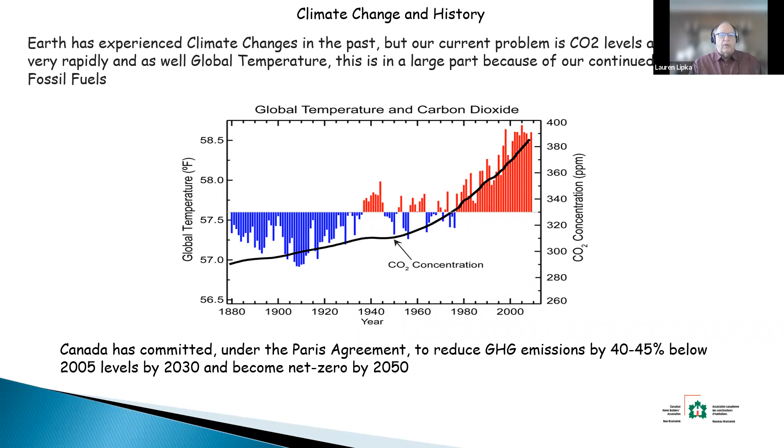So what is promoting energy efficiency in buildings right now? The law. Around the 2015 and the 2020 National Building Code dictates minimum levels of energy efficiency when constructing new or renovating existing buildings. This is what the codes look like.

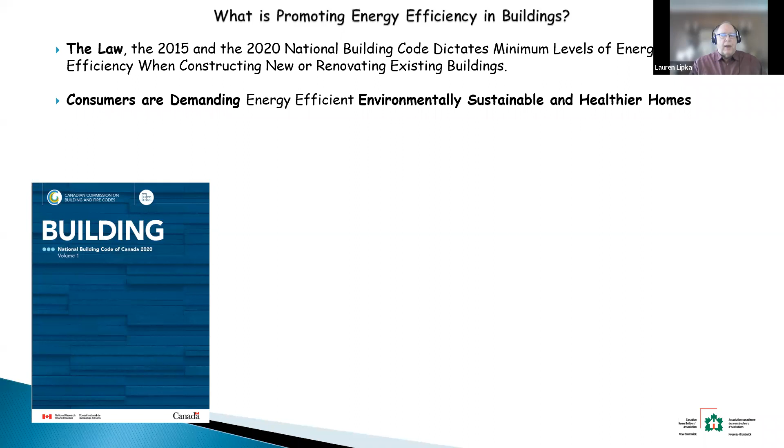Consumers, like yourselves, are demanding energy efficient, environmentally sustainable, and healthier homes. Energy upgrading saves homeowners money, typically will pay for themselves, improve durability and comfort, plus lower greenhouse gas emissions.

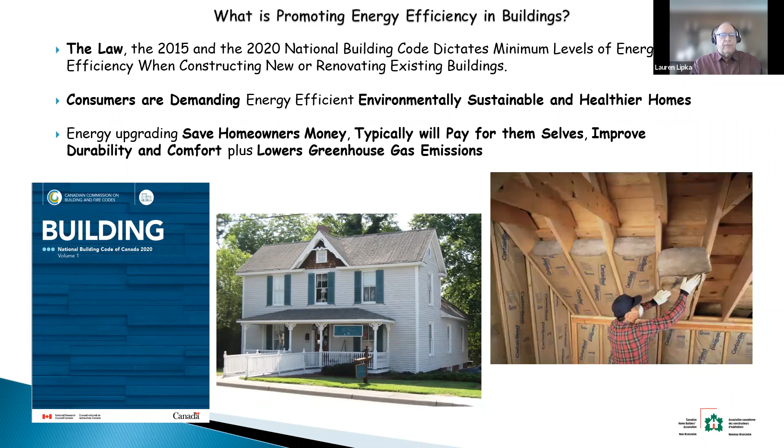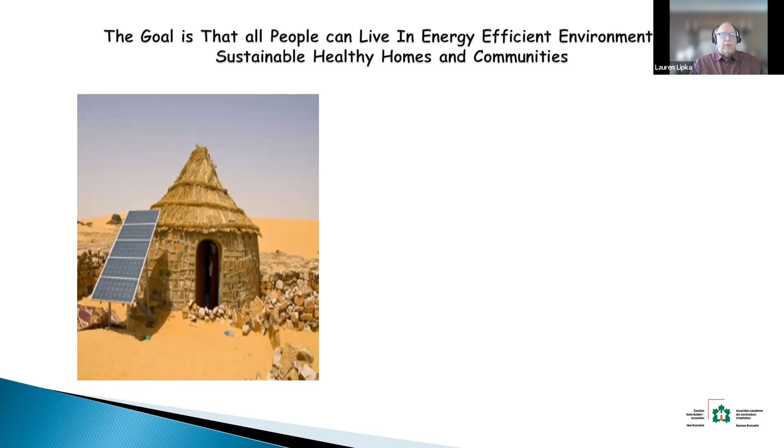The goal is that all people can live in energy efficient, environmentally sustainable, healthy homes and communities. Let's look at some characteristics of what an energy efficient, environmentally sustainable, healthy home might look like.

Homes that have reduced volatile organic compounds, VOCs, by using painting and cleaning products having low VOC content, as determined through Green Seal, EcoLogo, or GREENGUARD certification programs, for any products that are considered green and are made from products that are natural and not chemically based.

Use of energy efficient, Energy Star qualified appliances and lighting like LED. And the implementing use of home energy displays, providing real-time actual energy consumption or energy saving automation systems.

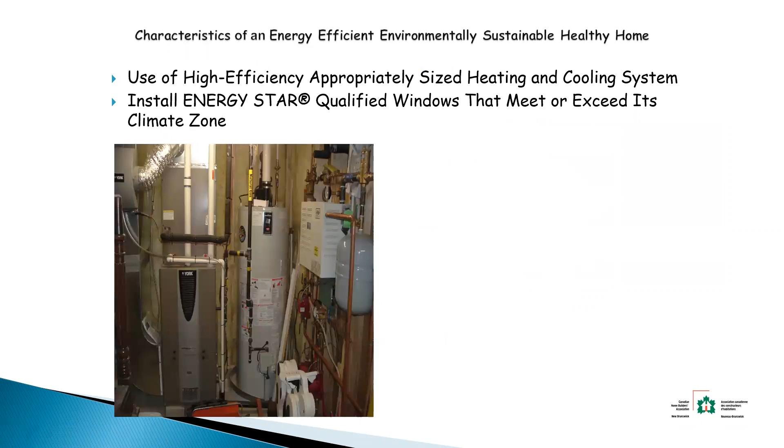Excuse me, Lauren. Yes, go ahead. This is Sheila Scott, one of the teachers here. I know a lot of this is probably quite complicated because these are English second language students. Could you just go back a few slides and show the pictures of the things that students or anyone can be buying that would save money? So yeah, right about there, right about there.

Just explain that a little bit more and repeat it a bit more slowly. I'm wondering, are the interpreters able to interpret? I'm not sure they're having enough time. Yeah, I was going to ask that. I was wondering if maybe I was going too fast, but at the same time I didn't want to go too slow either.

Well, just like you need to take a pause so they have time to interpret after each little piece of information. That beginning stuff was quite difficult to understand if English isn't your first language. But I think we need to focus on the things that can be of benefit to them, to save money, so if you can go a little more slowly and focus on the key points, and give time for the interpreters to interpret, that would be great. Thanks so much. Oh, no problem whatsoever.

For this first slide, what we're looking at is that if you have products like this in your home, it's maybe a good idea to remove them. We have redemption centers in this province where all these different chemical products can be disposed of safely. We don't want to be breathing these types of chemicals, they're harmful to our bodies.

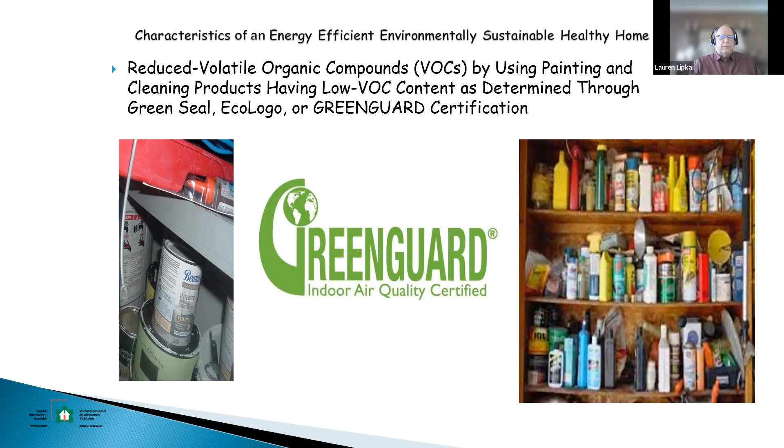When it comes to buying appliances, there are many appliances designed to be energy efficient. Appliances that show this label, the Energy Star label, or the EnerGuide label, should explain to you how much energy this appliance would use.

So things like refrigerators, dryers, washing machines, dishwashers, microwaves, and ovens. Changing out your existing older style light bulbs for energy efficient LED light bulbs. And of course, always look for this Energy Star label on appliances and lighting.

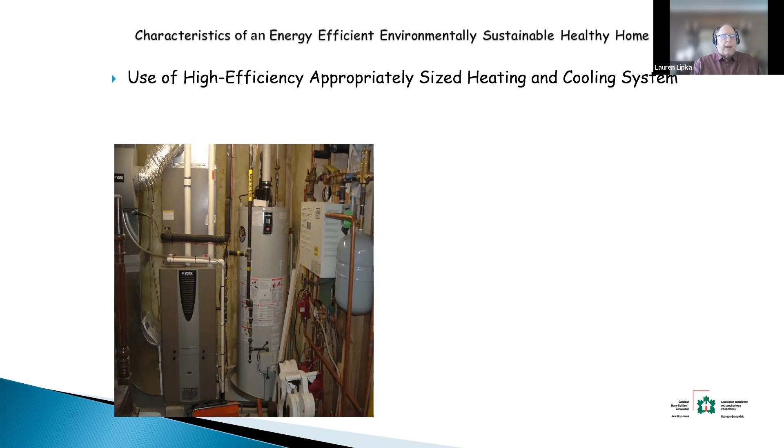Heating systems, of course, you want to find the most energy efficient, and look for the Energy Star logo on any type of heating system as well. Energy Star appliances, Energy Star heating systems, and the most energy efficient systems you can find. Working with companies from local hardware stores can help you find the most energy efficient makes and models that may be out there.

If you are replacing windows or doors, try to find Energy Star qualified windows that meet or exceed our climate zone. When I say climate zone, I mean a window designed for very, very cold regions or areas is the type of windows we should be looking for.

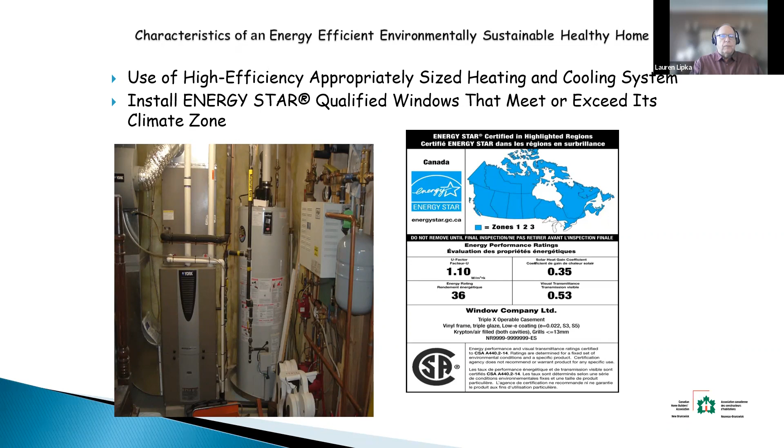When it comes to things like washing machines, sinks, showers, maybe spare bathrooms, if possible, have your hot water tank more in the center so it doesn't take so long for hot water to get all the way to the furthest part of your home. Another thing: if you wash your hands, try to use cold water rather than hot. Because if you turn on the tap, hot water has to run all the way to the furthest spot, and once you turn off the tap, that water just sits in the line and is wasted energy.

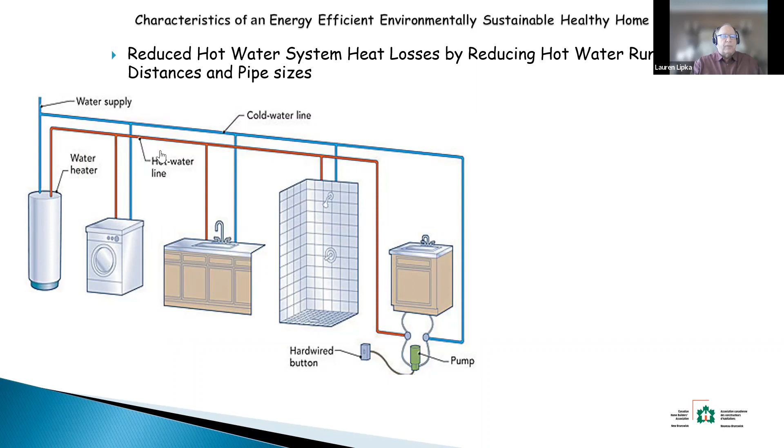You can also insulate the lines as best you can, which helps reduce some heat loss. In winter this isn't too bad, since some of the heat energy helps heat the home. But in summer it can cause condensation or water to drip off the pipes, causing damage, and the heat from these pipes can cause unwanted heating in our home.

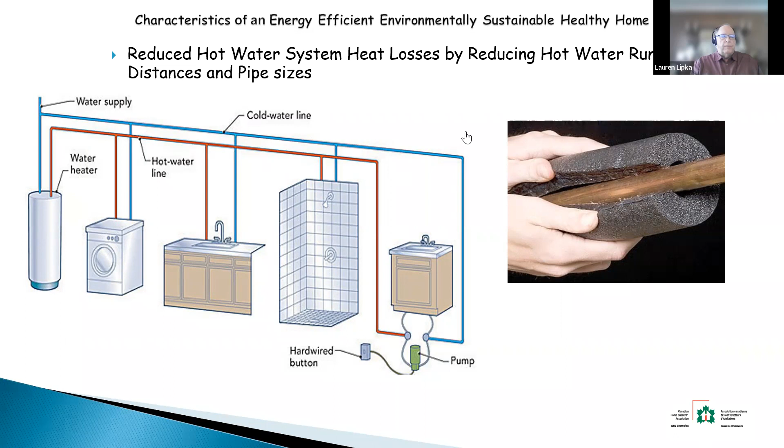Using water conserving plumbing fixtures like low flow shower heads and faucets.

As you can see, if we were looking at a normal shower head, the flow is around 9.5 liters per minute. With a low flow shower head, it's 7.6, and bathroom faucets can be as low as 5.7. What this means is that we're conserving the use of water, helping to protect our environment by using less water.

And by using less water, we also will not have to pay as much for heating it as well as for using it. It will save us money.

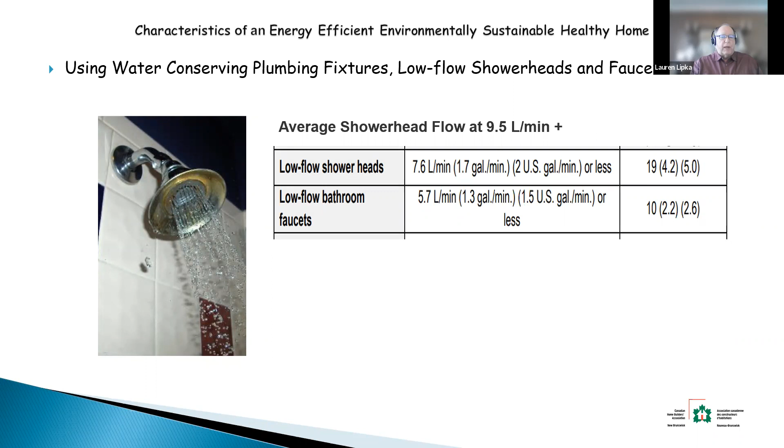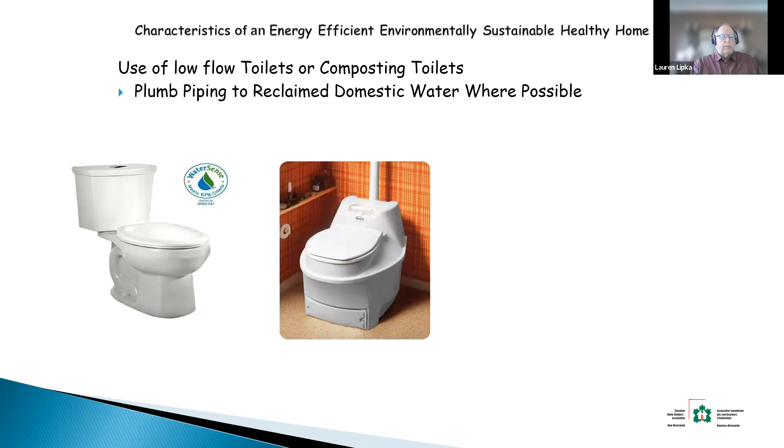Use of low flow toilets or composting toilets. Also, looking at alternative designs where you could wash your hands and this water would then go inside the tank, then could be used for flushing.

So we all agree that upgrading existing homes or designing new homes to be more energy efficient, environmentally sustainable, and healthy is a worthwhile goal.

What else can we do to reduce our personal energy usage and our carbon footprint?

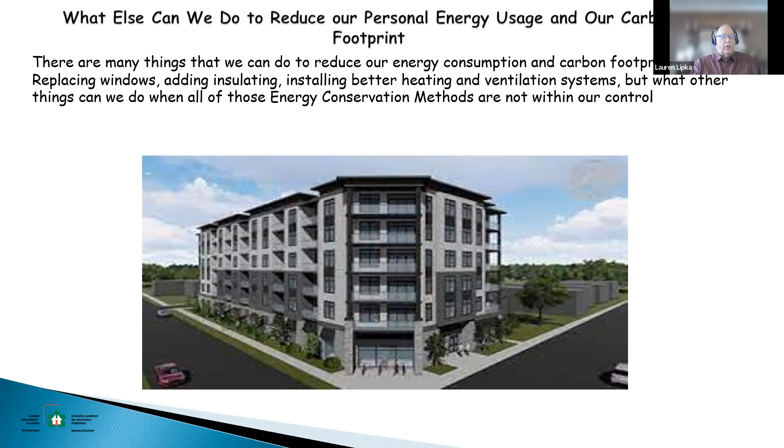We can look at the energy pyramid and do things like turn off lights and electronics when we're not using them. Unplug appliances or use power bars to be able to shut them down when we're not using them. Have shorter showers and try to conserve water usage as best we can.

Then, as we move up onto the pyramid, we can do things like LED lighting. LED lights use less energy than normal light bulbs. Smart grid infrastructure, so learning about how our grid works. Energy efficient, smart appliances. Programmable thermostats, which is how we can control the heat in our homes.

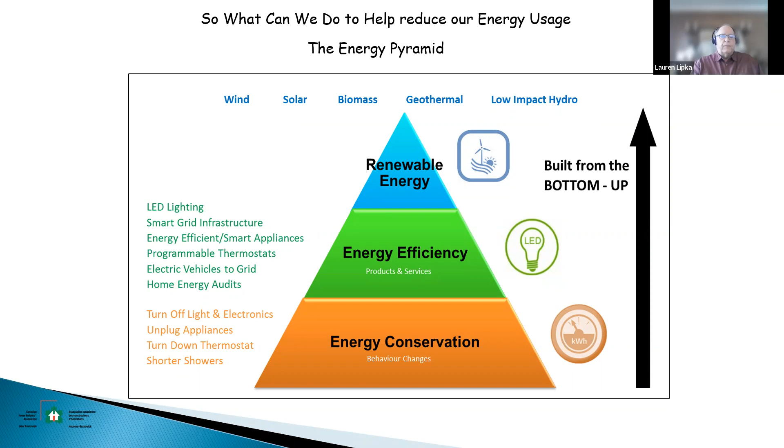So what are some other things that we can do? Participate in education programs promoting energy conservation. Participate in energy efficiency programs to use less energy and reduce greenhouse gas emissions.

Shift when we use energy to reduce peak demand in mornings and evenings. Changing our daily behavior can collectively help to smooth out the peaks. I will explain how this works.

In the morning, we all get up. We may turn on our coffee pots, we may have showers, we'll cook breakfast. And if everybody in the province does this early in the mornings,

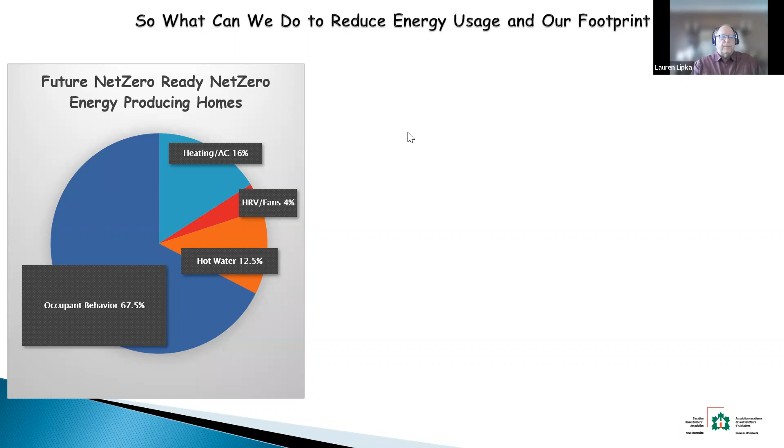So I have a few more things we can look at that can help us save energy and reduce our carbon footprint as well: air sealing of our homes - this is where air comes in around windows and doors; using more natural light; what artificial lighting is energy efficient and healthy; home electronics and phantom power use; and energy efficient appliances. We're going to look at some of these things in this workshop today.

What else, when we're leaving the home, what could I do to also help conserve energy while I'm away? And when is it time to recycle or donate some of my older products?

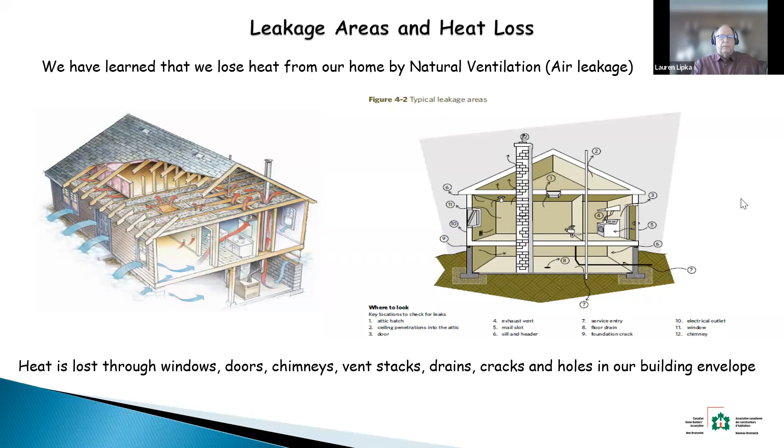Typically, about 25 to 35%, or even higher, of heat loss can be due to excess air infiltration and exfiltration, or leakage out of our homes.

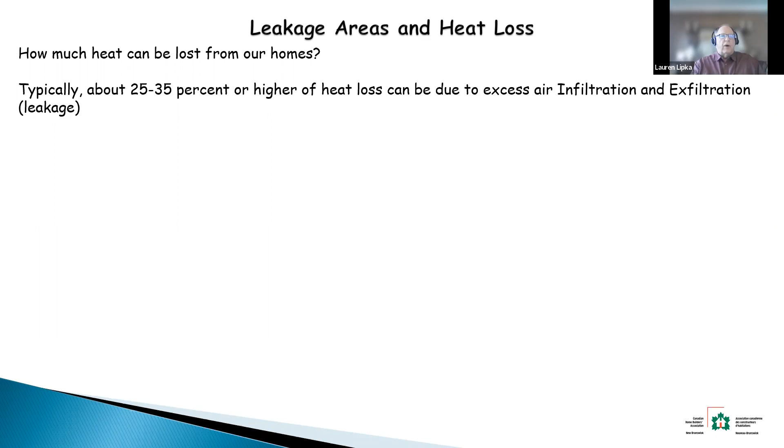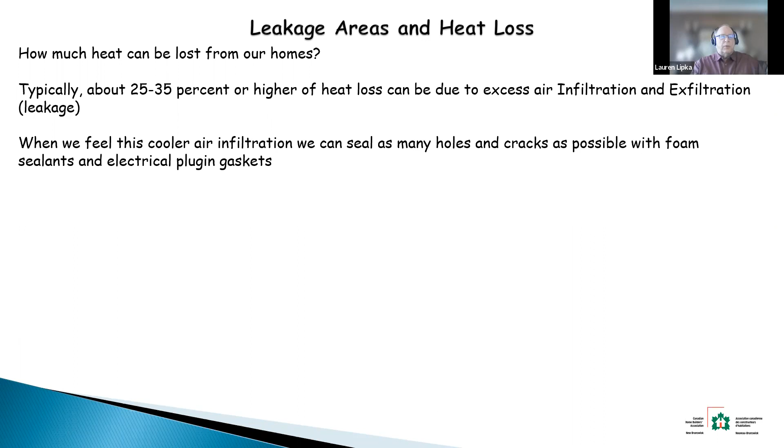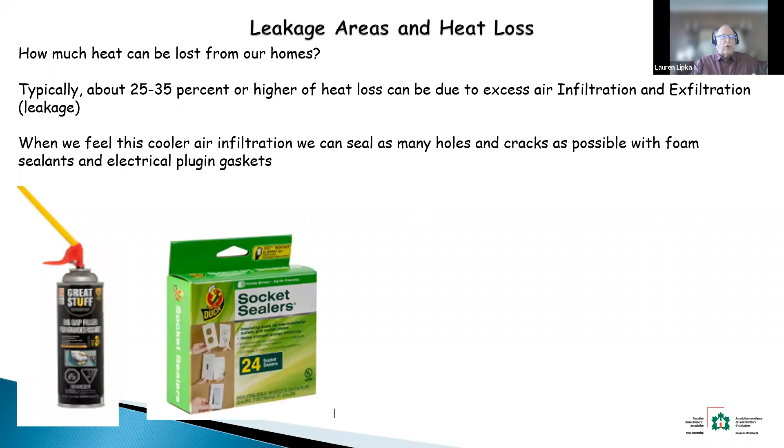When we feel this cooler air infiltrating into our home, we can seal as many holes and cracks as possible with foam sealants and electrical plug-in gaskets. We can also use these products to seal different places in our homes, and childproof plugins into any electrical sockets that are not being used at the present time.

Many of these products can be purchased from any local hardware store, and they can assist you in how they can be used or installed in your home. Many should also have directions and be able to help you or assist you to implement these different products.

Spray foam works well for filling holes or cracks that are fairly large. Gaskets work well for around plug-in covers if you can feel air coming in these areas. Same after that, using the child-proof plug will help to seal off any plugins that are not currently being used.

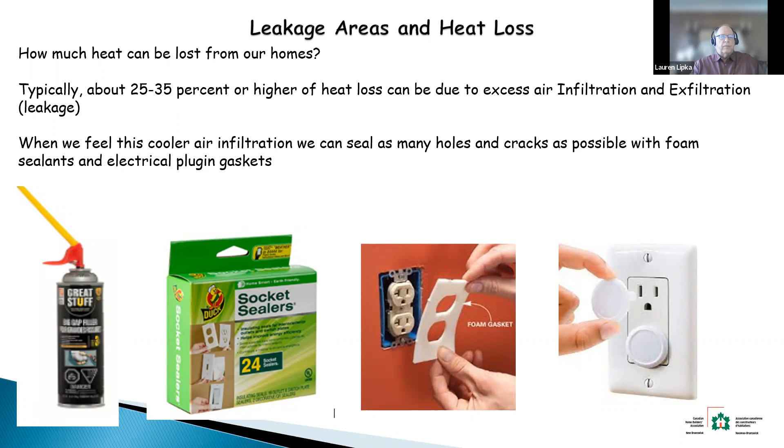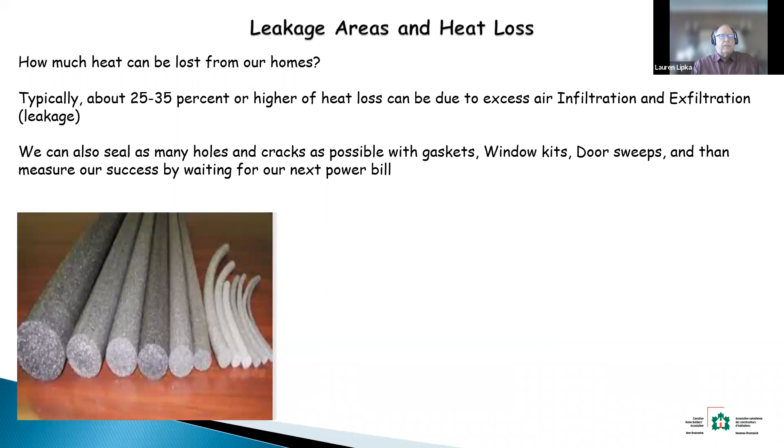We can also seal as many holes and cracks as possible with gaskets, window insulator kits, door sweeps, and things like that. These are like swimming pool noodles and come in all different sizes and shapes. Or if you have an older window, these can be used to cover over your window to help slow down some drafts that may be coming through them.

Door sweeps can be purchased from your local hardware store - all of these products can be. And this will help to reduce drafts coming in from underneath your doors.

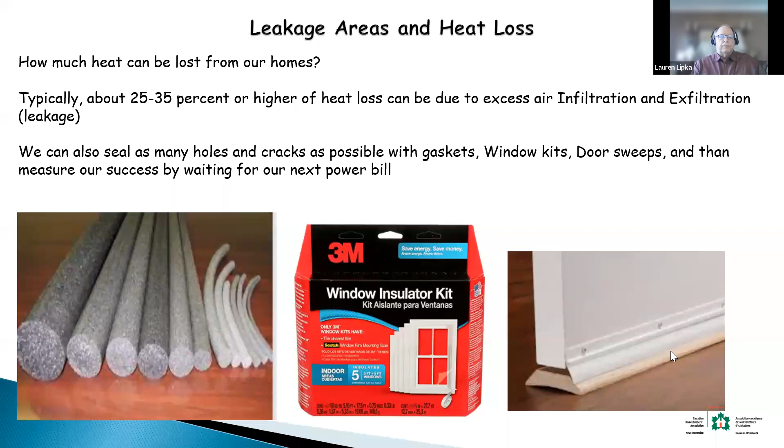However, as we seal our homes, there is less natural air exchange. And at a point, our home may require what we call mechanical ventilation. We should look to install what is called a heat or energy recovery ventilator - HRV for heat recovery, or ERV for energy recovery ventilator.

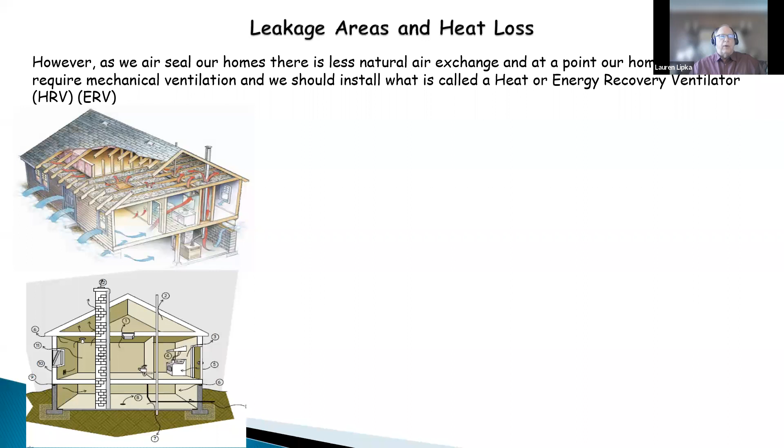You'll be able to tell that once you start to tighten up all of your homes or seal all the holes or drafts, air infiltrating into our homes and heat energy exfiltrating out will change. Once we start to tighten up all the different leaks, we will need more ventilation or air for us to breathe in order to have clean air that we can breathe.

Otherwise, if we start seeing things like condensation on our windows and on our walls, this is an indication that we may need more mechanical ventilation. What if we start to see things like mold or mildew? These are also signs that we don't have enough mechanical ventilation in our homes.

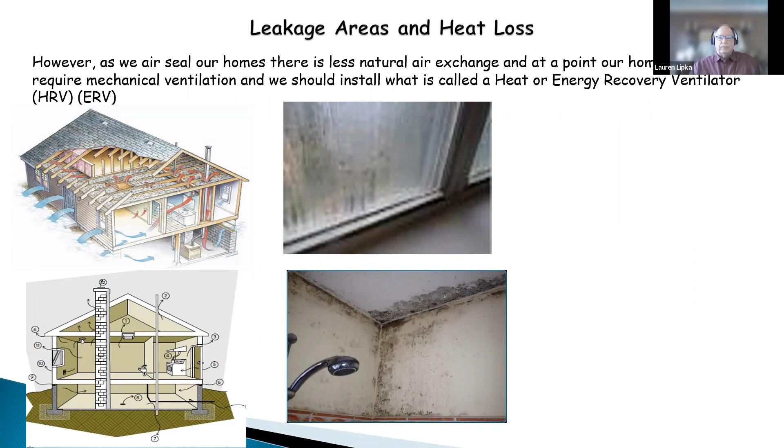This is called sensible recovery efficiency. The more efficient the HRV or ERV is, the more energy it will recycle back into our home, saving us money and providing fresh, clean air for us to breathe, and also helping to reduce condensation or excess moisture that has been building up in our homes.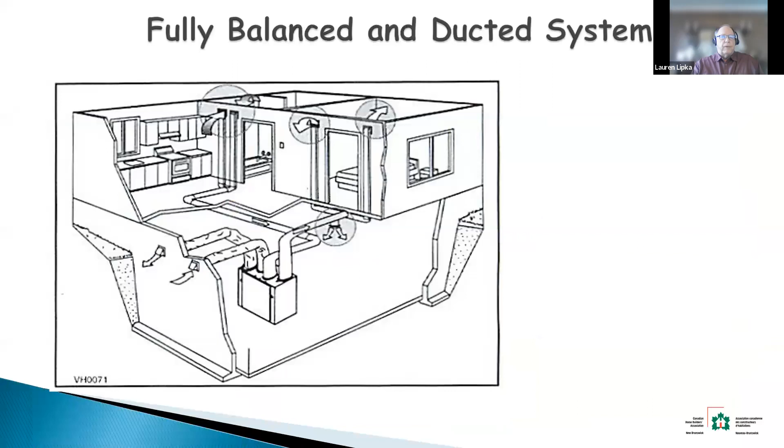So when I talk about humidity in the homes, this is what I talk about. We don't want our home too dry, and we don't want our homes too wet. At this time of year, because the air is very dry, if you're experiencing static electricity when you touch things and get a spark or shock, or if your furniture may be cracking or your floors are separating, or you're having respiratory irritations or nosebleeds, these could be indications that the air may be too dry in your home.

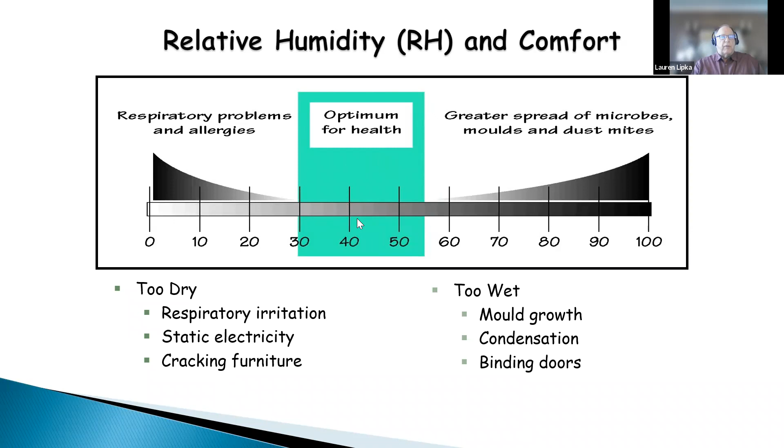On the other end, if you have lots of moisture on your windows, or if you can see mold or mildew growing, these could be signs that your home has too much moisture. You can start to see mold, condensation, binding doors. When I talk about binding doors, that's where doors and cabinets may not want to open, because they're filling with moisture and expanding. You can also have more chances of microbes, dust mites, things like that. So controlling the moisture levels in our homes is very important.

How much humidity do we need in the wintertime? In the wintertime, we're looking at around 35 to 45%. It's called relative humidity. If you're experiencing things when it's really dry, you may have to add some moisture to your home, things like showering, washing clothes, cooking food on the stove. These all create moisture in our home, and we don't want too much. On the other end, we also don't want it too dry, because that can also cause problems for us as well.

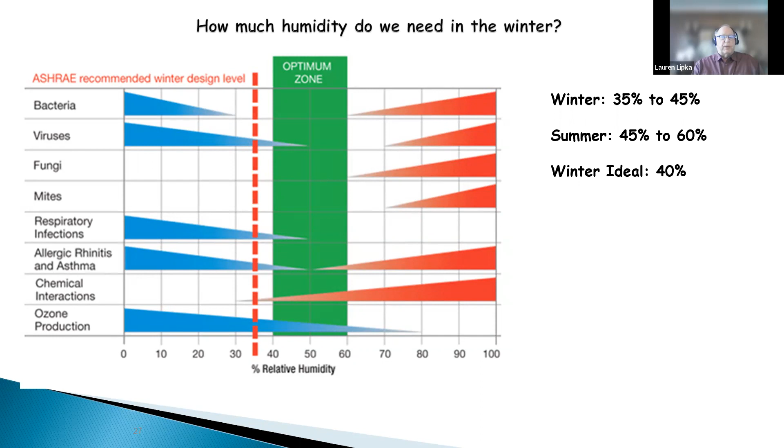In the summertime, anywhere from maybe 45 to 60%. In the wintertime, it'd be ideal to have around 40%. Otherwise, if it becomes too high, you'll start to see lots of moisture forming on your windows. This moisture inside your home can cause damage and issues, and will start to cause window frames or anything that's a wood product to start to rot.

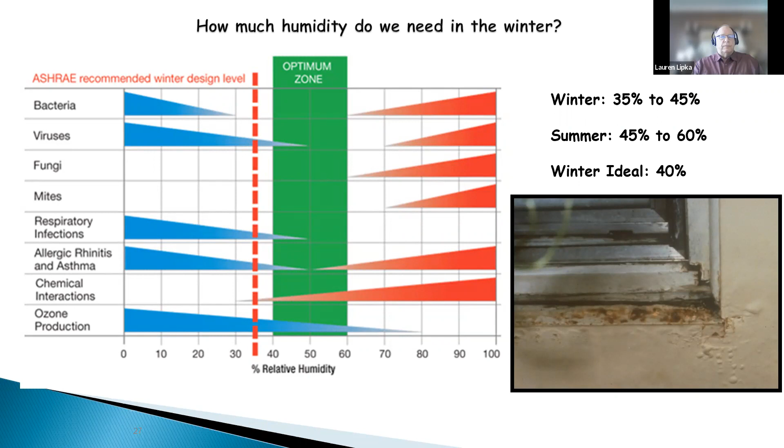Natural lighting: humans prefer to work and live in spaces with natural light rather than artificial light, as natural light helps to create a more comfortable and pleasing home. However, our preference for natural light lies deeper and is intimately connected to our brain functions and natural body rhythms, or circadian rhythm, which is our body's 24-hour sleep-awake cycle.

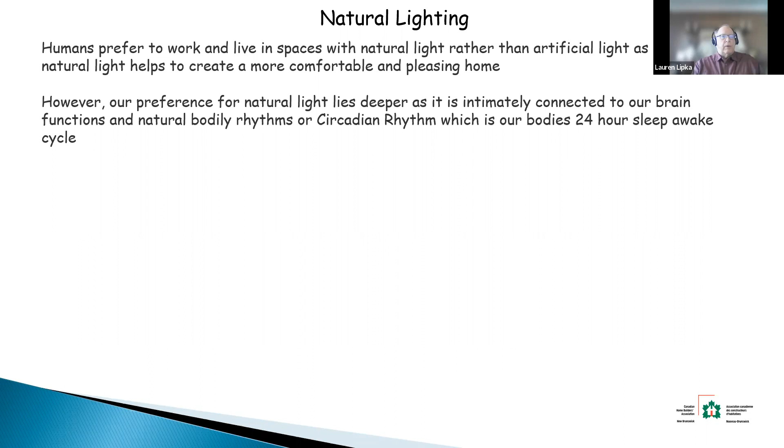Countless studies have proven the benefits of daylighting, such as increased productivity in the home and workplace, enhanced educational performance in elementary schools, and improved patient recovery times in hospitals.

Studies have shown that being exposed to daylight or only artificial light over the course of several days, people living and working under natural light were significantly more alert, while exposed to artificial lights, participants feel more tired due to lower cortisol levels, leaving them more stressed and with reduced energy levels later in the day. Cortisol is a stress hormone which controls sugars or glucose in the bloodstream, enhances brain functions, repairs tissues, and controls potential fight or flight situations.

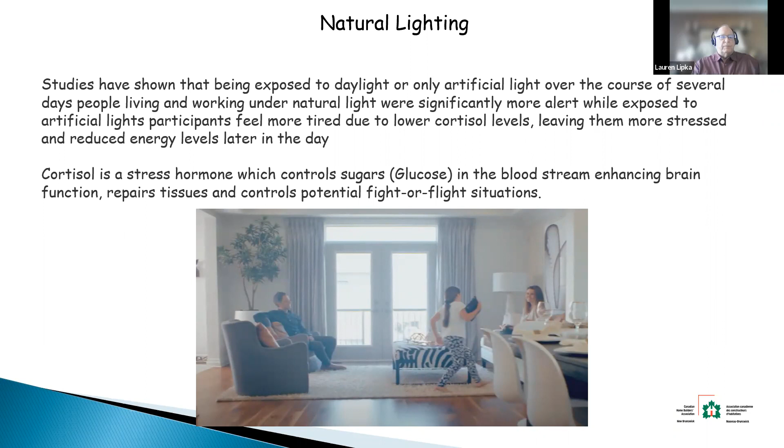Things we can do to bring more light into our home: install larger energy efficient Energy Star windows and doors, letting in more natural light as much as possible. Add mirrors and shiny objects. Choose brighter interior colors. Try glass blocks for wall dividers to let more light travel within the home. Clean windows and paint trims white. Use lighter window treatments. And if possible, add skylights and things to our homes.

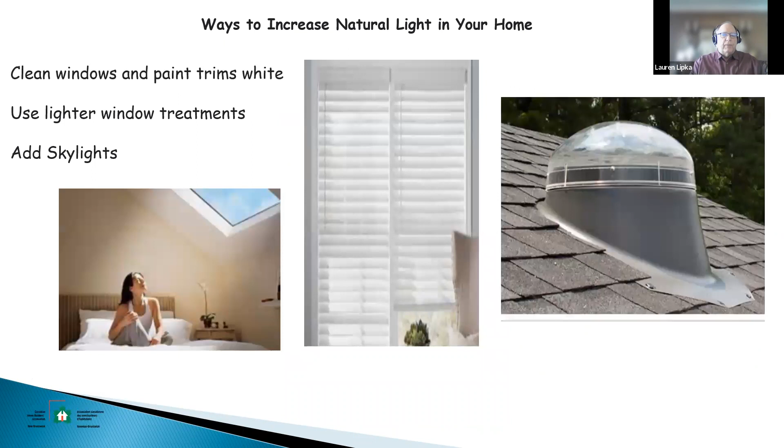But I'm just going to ignore that for a second here. I'm going to go through and pull up a website for you that some of your participants may be able to go to and get some assistance with the items you're talking about. It was for the next presentation, but I'll just go forward really quickly here and bring it up. Or, I got a better idea, what I'll do is just this for a second. Just bear with me. If you were to go to your website and type in save energy NB, right?

They have what's called the NB Power Energy Programs. So if you were to click on that, and then go to the section that says 'For Homes,' there's a section, it's kind of tricky to get to with your mouse. There's one called the Renter Energy Saving Kit Program. If you open this up, there is some information for renters, they can ask questions, things like that. And they can also order this kit for free. So you can order this kit, and when it comes, there are some different things included. Each kit will contain the following easy to install products.

LED light bulbs, an LED night light, and an electric power bar, and faucet aerators to help reduce some of your water usage.

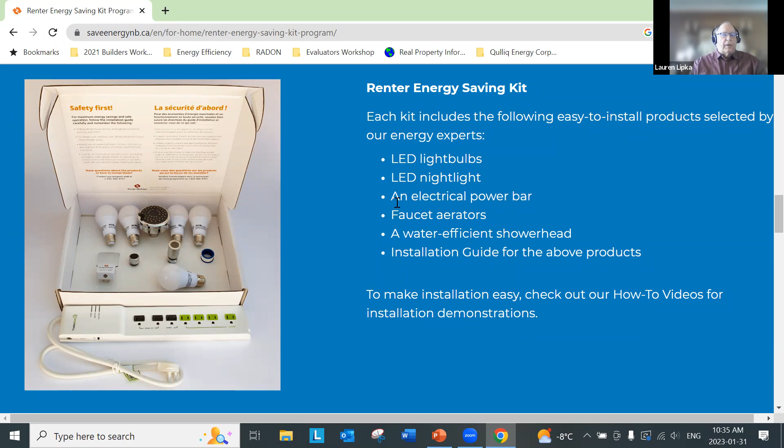A water efficient or low flow shower head. Okay, and then installation guides for all of these products and things like that are all there. There's also some do-it-yourself installation videos that they can watch on how to install these products in the home.

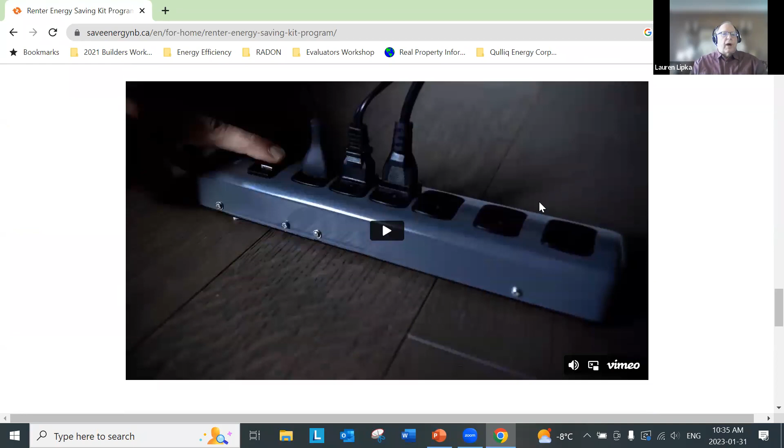Some things on how it talks about phantom loads and power bars, and how to install the faucet aerators. Things like that. All right, that's good to know.

I will also come back to this again when we do our second workshop. But I just want to show you that if you wanted to, inside here there are places where you can ask questions, learn more things. You might also have some of your participants maybe looking to eventually buy their own home. Hopefully that would be the plan for everyone eventually, to have their own homes. And these are all things that can help you to be able to get some incentive money for appliances, things like that.

Thank you. And that's at, you just type in Save Energy NB, it's right there. Save Energy NB, and this information will all come up. So there's also education and tips. Sometimes it's a little bit tricky to use, but saving energy checklists, energy efficiency how-to videos, energy efficiency articles, many of the things that I would be talking about, educational tips on air sealing, articles, things like that.

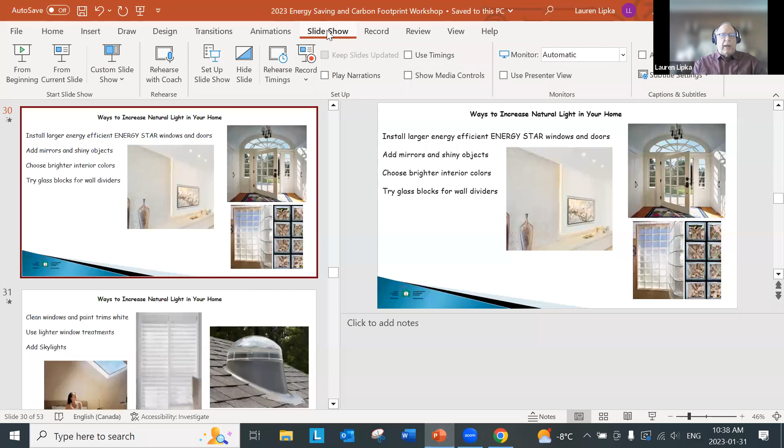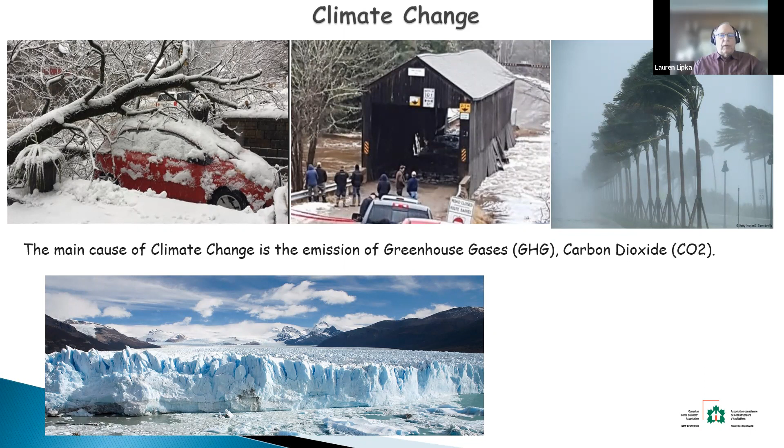Thank you, no problem. Any other questions that anybody may have from the workshop? Because I can go back over anything that anybody would like more information on or to discuss in more detail. I am totally at your... Hello, Lauren, I have one question.

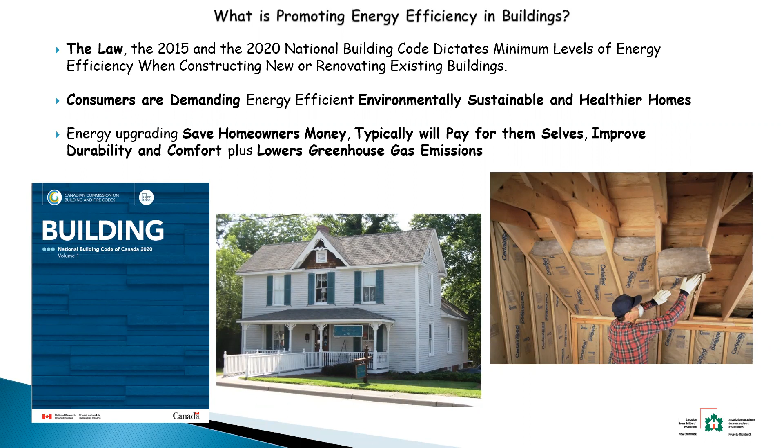Are there some incentives for shifting energy use to evening or morning? For example, does energy get cheaper in the morning than another time? Right, that is a great question.

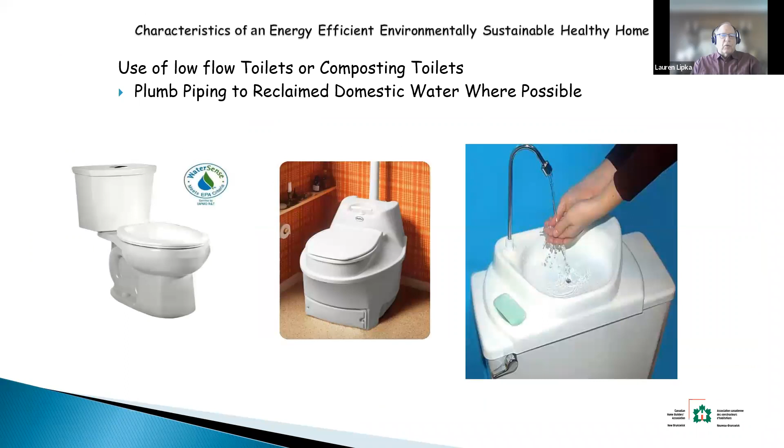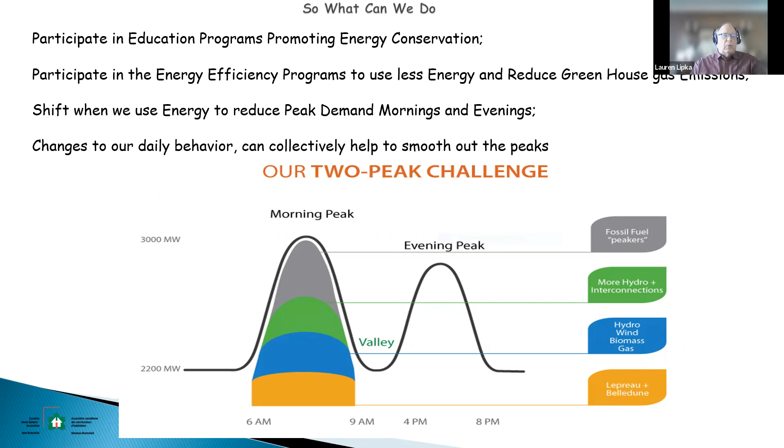Unfortunately, in the province of New Brunswick, we still don't have what they call time of use yet, but I think that maybe in the future we may see this. For the other participants, what this gentleman is talking about is that in other provinces, in some areas, if you use electricity off these peak times, there's sometimes a reduction in the cost. Or if you do your laundry at night, cooking at night, or charging up your car or batteries at nighttime, sometimes they have a reduced rate, but unfortunately New Brunswick does not have a time of use reduction yet.

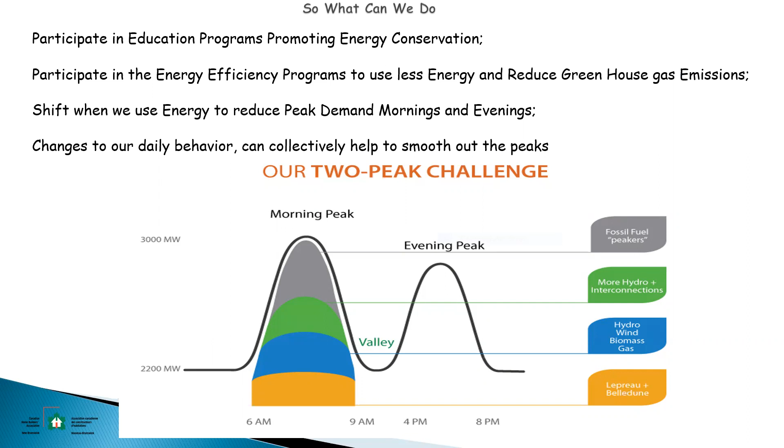Thank you, I have another question. It's about the energy monitor. Okay, who can install this? Can I install this in my home?

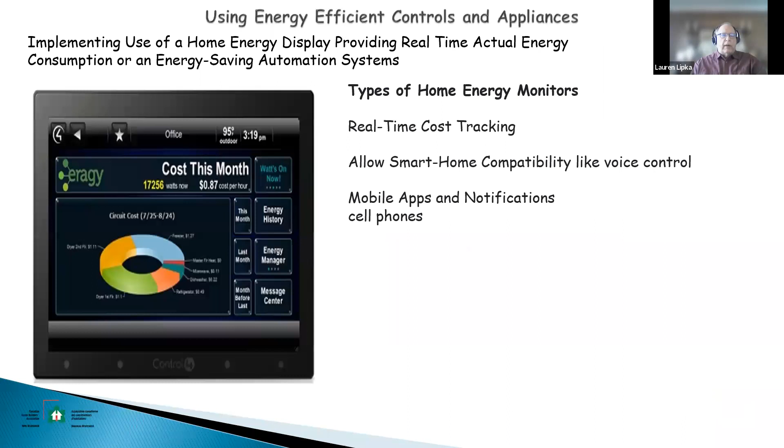What I would do is, when you go to a local hardware store and find a store that sells these products, talk to somebody, the salesperson, and ask them what all they can do for you so that you end up purchasing the right system for your home. Typically, in most cases, they can be installed by yourself, but if it has to hook onto an electrical box or something like that, then you could talk to your landlord, or an electrician could come and easily hook these systems up for you.

They're actually designed to be very, what would I say, user friendly, right? Many of these systems can basically just be plugged into your appliance, and then an app is transferred to your phone, or you put the app on your phone. So a smart appliance, like a refrigerator, let's say, may have an app attached to it so that you can monitor how much electricity this unit is using.

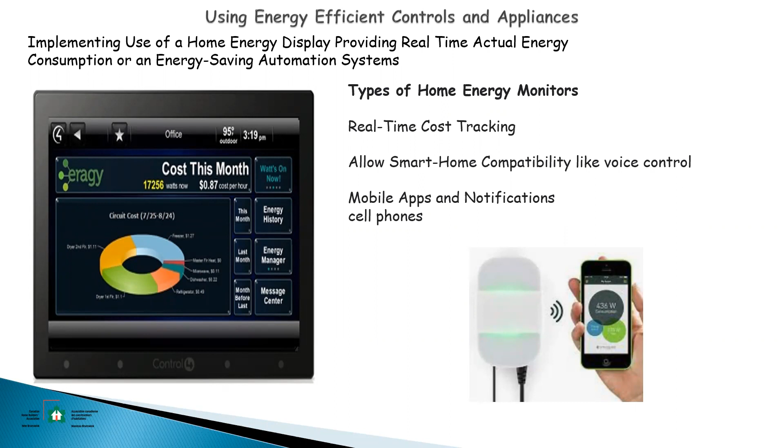I have a question for you. I like the idea of having natural light in our home. I'm a homeowner, but would that work against energy efficiency with leaking, or are there some good products that can actually prevent that? My second question is, do we currently have some incentive program from NB Power? Years ago I installed an air exchanger through a program, and we saved a lot of money. I'm just wondering whether there's anything like that currently that NB Power offers.

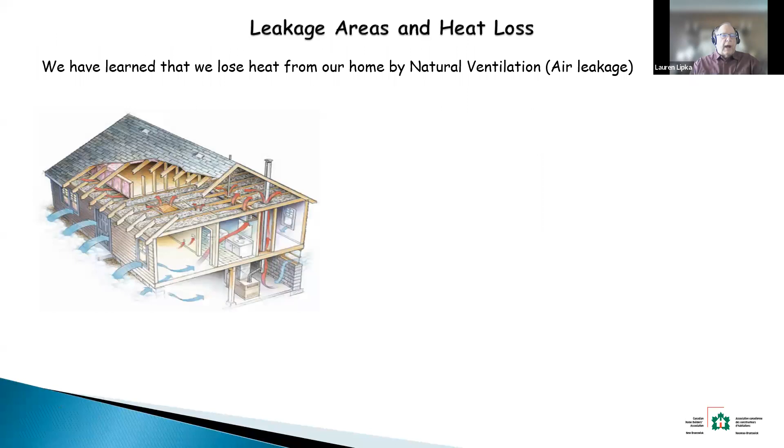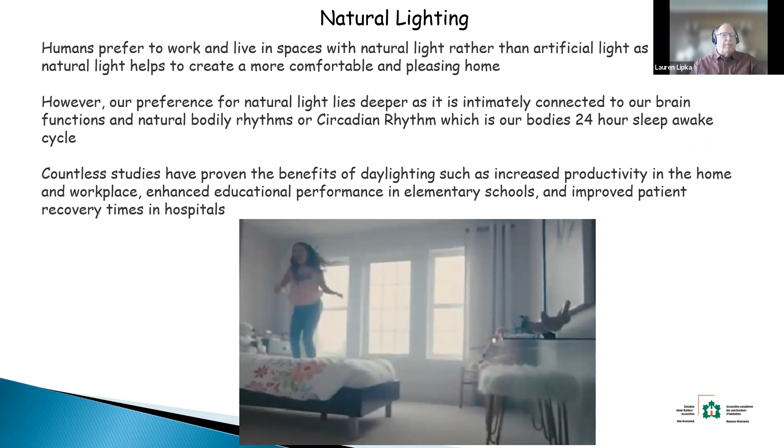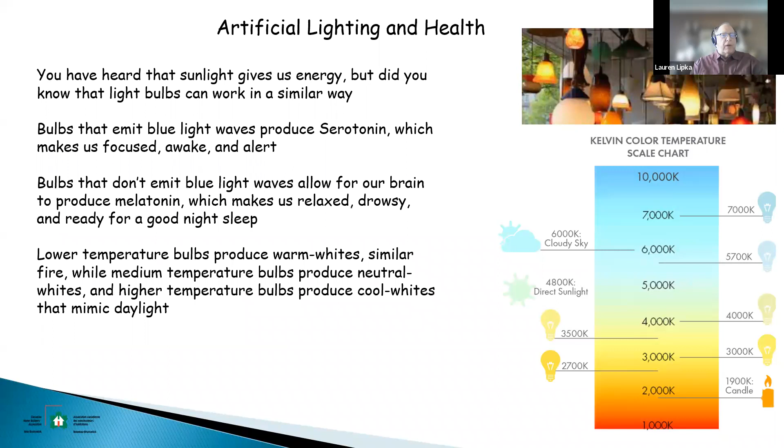Thank you. Yes, all right. So I believe the first question, about natural lighting into the home, let me just get there really quickly. Natural lighting, of course, being able to find the right type of light bulbs, things like that - it's part of my second workshop. But here it is, artificial lighting and health. So the products that you could get from the rental kits from NB Power will have some explanations about different types of lighting. When we talk about how bright a light is, or whether a light can provide everything we need for our bodies, like simulate sunlight, there are different types of light bulbs out there. If you talk to somebody from a local hardware store, they should be able to help you with what lighting systems would work best for you.

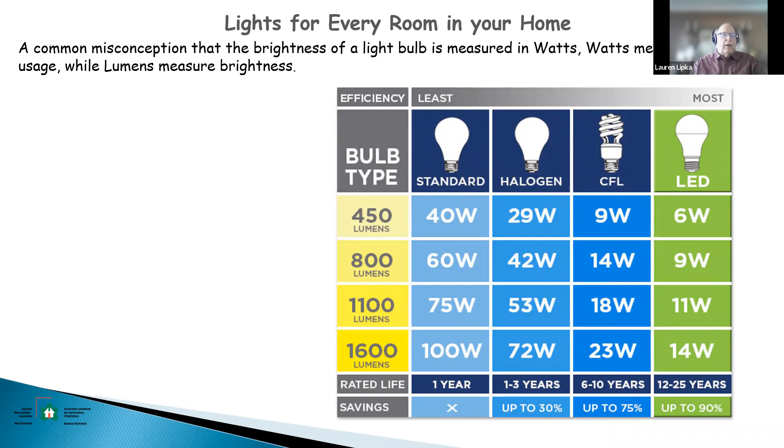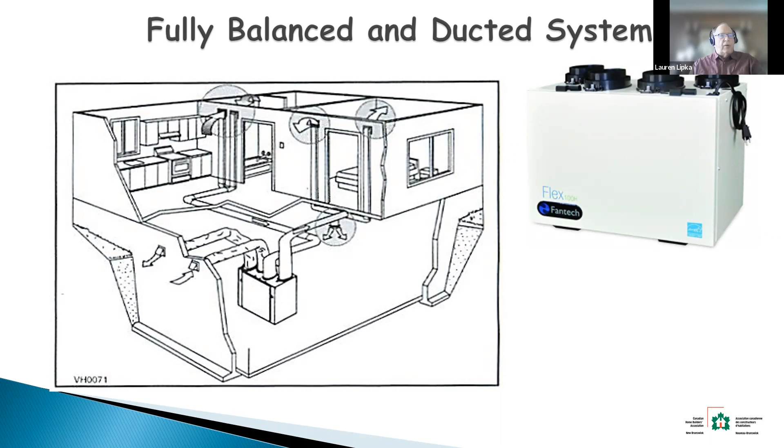Now, the second part - the lady had talked about installing in their home that HRV or ERV, which was this one, to help maintain fresh air in their homes. The tie-in to this question was whether if I was to go to NB Power, were there any incentive programs for things for your home? So under Save Energy NB, if you go and type in 'for home,' just click on that, it comes up. You can see we have an enhanced energy savings program. Down here, it's kind of tricky - enhanced. This is for families that make a lower amount of money. I don't know what the threshold might be. So there are things there that can help them with energy efficient products for their home.

There's also what's called a total home energy savings program, for homeowners that own their own homes. They'd be able to get insulation, windows, doors, heating systems, things like that. If you're looking at building a new home, there are incentives. When I'm talking about incentives, this is where you can get money to help for buying or purchasing these products. Okay? Does this help you? Yes, thank you very much. You're welcome.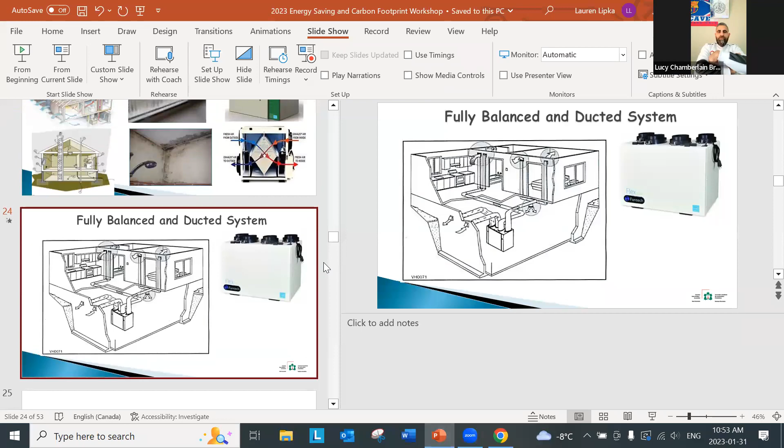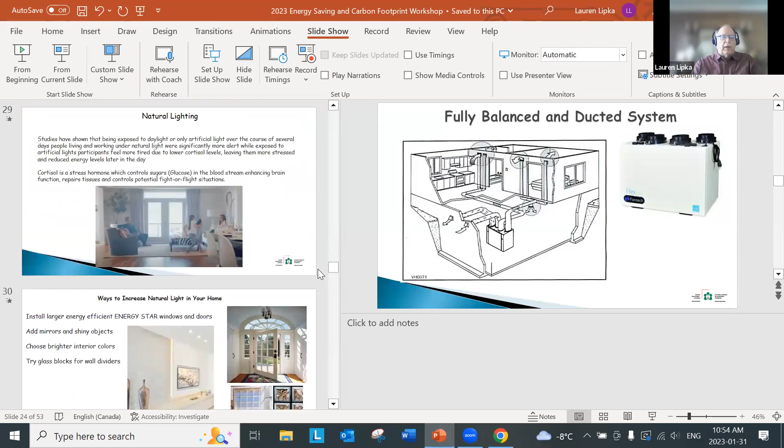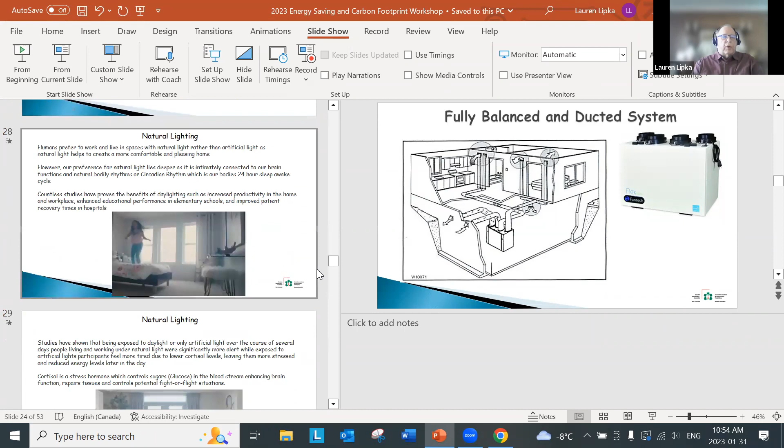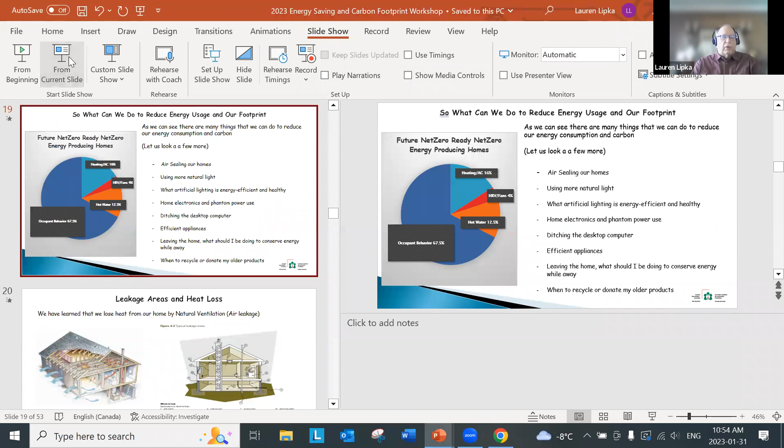Great, and now the second part of this workshop, I'm going to be looking at some other things with respect to what I was looking at here. The next workshop, I'm going to be talking about - where was I? I can't find it now - but all these other different things, we're going to be looking at different parts of. There it is, okay. So in the next workshop we're going to be exploring some of these other things.

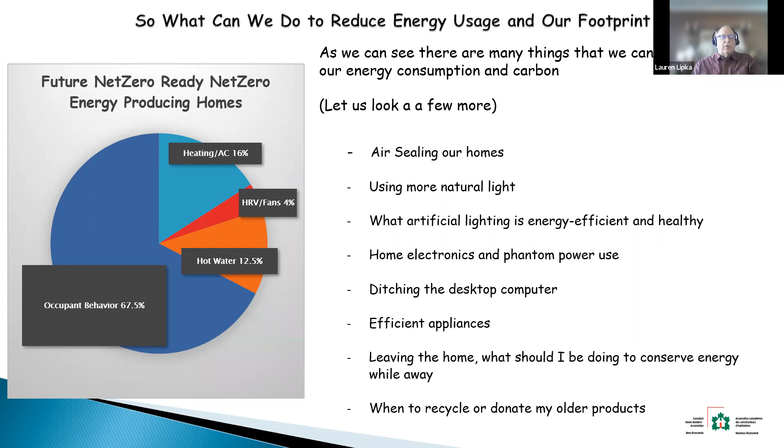Using more natural light, what artificial lighting is energy efficient, some home electronics and phantom power use, ditching the old desktop computer, looking at where to find energy efficient appliances, and leaving the home - what should I be doing to conserve energy while I'm away? And when is it a good time to recycle or purchase new products and get rid of my older products? So these are some of the things we'll look at in the next workshop, and we can revisit a few other things we talked about today.